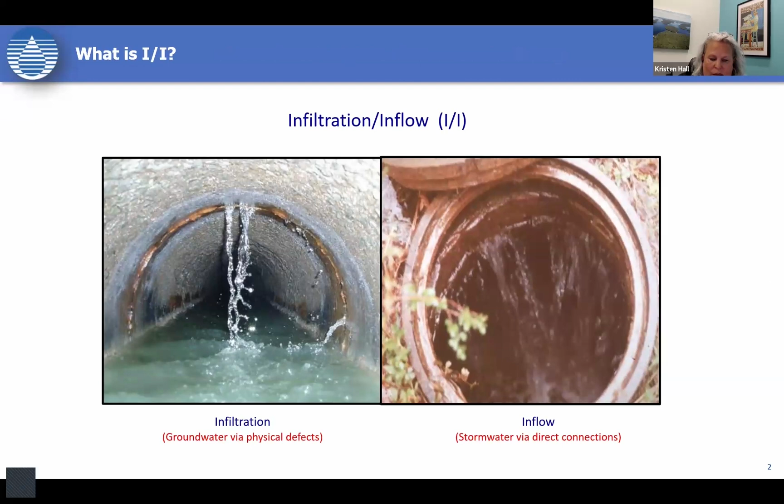So basically starting with some definitions, what is I&I? Infiltration is water that enters the sewer system via physical defects, and inflow is stormwater that enters the system via direct connections. An important point to note is that approximately 45 to 50% of the flow that goes to Deer Island is infiltration and inflow. We put together a visual representation of that for you using data from last year.

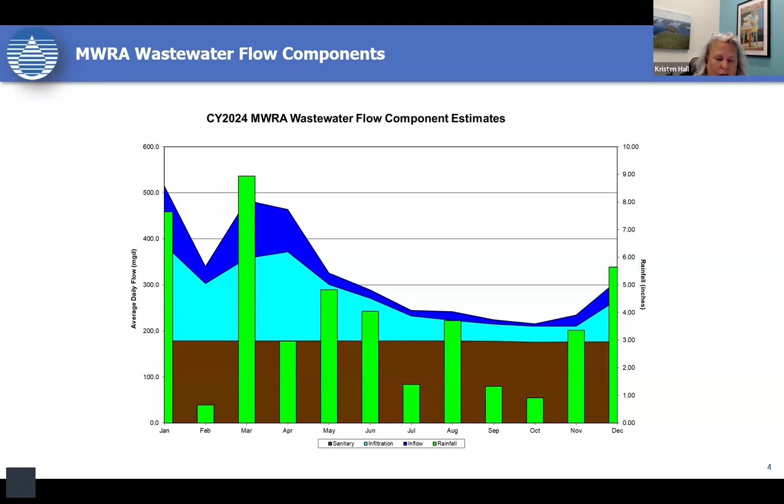MWRA has about 200 meters across the regional system in community sewers and MWRA sewers that we utilize in our rates process. Our metering group reviews the data, cleans it up, compiles it into a flow number for each community per month. Then my group takes that community level data and estimates three components: the sanitary flow, which is the brown line at the bottom of the graph, and that's flow coming from residences and businesses.

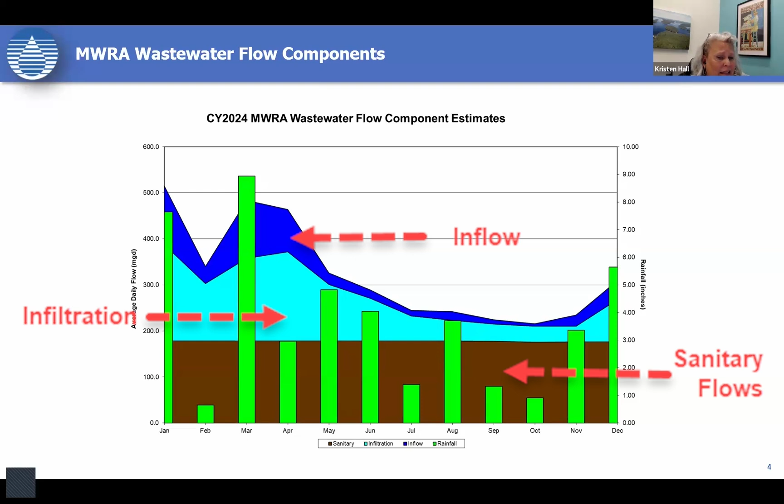Infiltration is the light blue on the graph, and inflow is the darker blue color at the top. The green bars represent the total rainfall for each month, so you can see how high infiltration and inflow are in the wetter, like spring months, versus the drier months later in the year. You can see we had that drought going on last year, where we had very little infiltration and very little inflow, almost right down to our sanitary estimates during September and October.

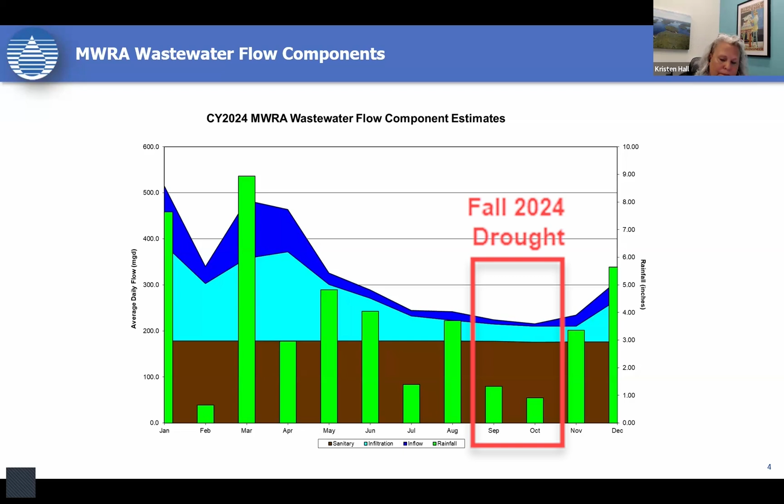So back to how infiltration and inflow get into the system. Sources of infiltration are listed on the left: cracked pipes, offset joints, leaking or broken service connections, or leaking manhole covers or manholes themselves. On the right, inflow comes from things like cross connections in the storm drain system, or homeowners that have sump pumps connected directly to the sewer system, interior drains like a floor drain in your basement, roof leaders or downspouts going straight into the sewer, or an exterior drain like in your driveway.

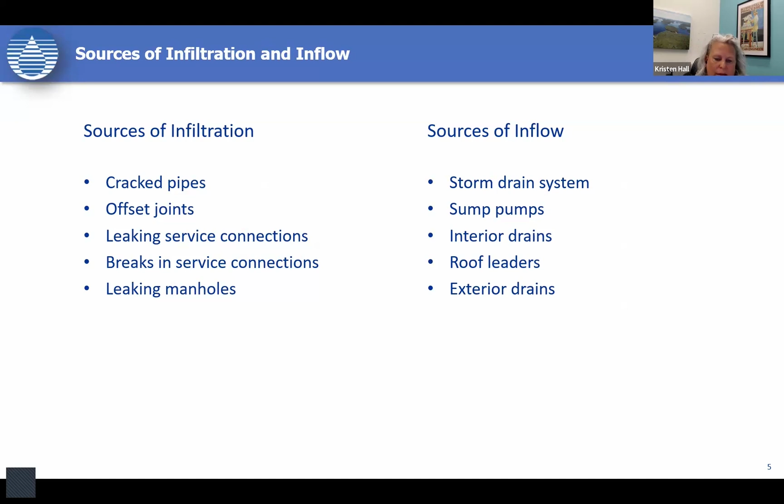So on the next slide, I found this graphic on the Norwalk, Connecticut Water Pollution Control Authority on their website. It kind of just shows you where all this water can come from. And I just wanted to make a note that if you're in the process of doing any outreach or public education, there's a lot of stuff that's already made online. Like I found this, lots of good stuff on a lot of websites. So I would take a look around.

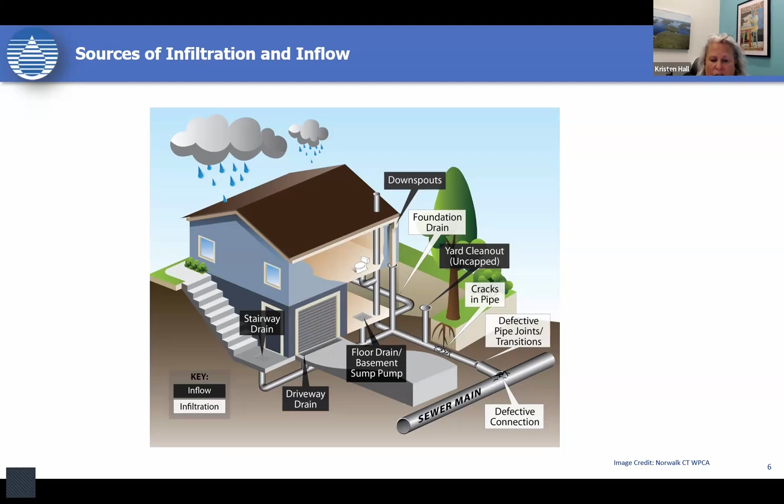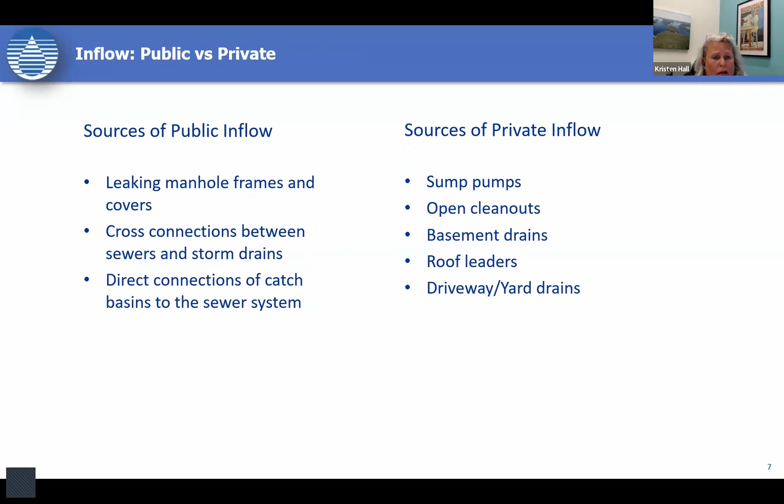So moving on to removing these sources. The public inflow is usually an easier issue to address because it's part of the community system. You have access to it. You can go check it out whenever you want, basically. For example, replacing a manhole frame and cover is easier than gaining access to a private property and redirecting a sump pump across somebody's lawn. Communities may have an easier time just dealing with their own things versus trying to get homeowners engaged.

But now communities have been addressing their I&I for years, and a lot of those public inflow sources have already been addressed. So private inflow removal is complex. It requires extensive investigation, gaining access to private property. There's lots of communication and coordination required. And of course, you're going to run into reluctant homeowners. It involves dealing with lots of smaller sources versus one big source. And we all know there's always a chance that the source that you just removed may be reconnected after you leave.

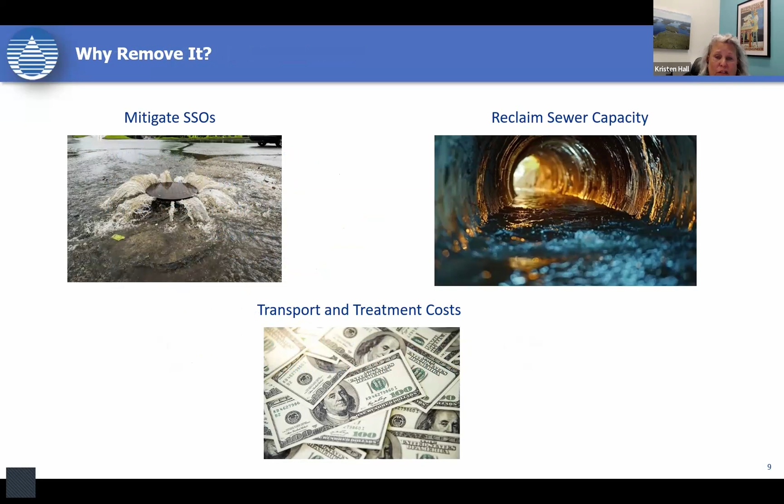So moving on to the next slide, and we've gotten most of the big sources. Why do we still need to go after it? Well, we want to mitigate SSOs. We'd rather not have water pouring out of manholes. We want to reclaim capacity in the sewer system. We want to reduce transportation and treatment costs. Remember, half of the flow that goes to Deer Island is clean water, and you're paying to transport and treat that clean water. So next slide.

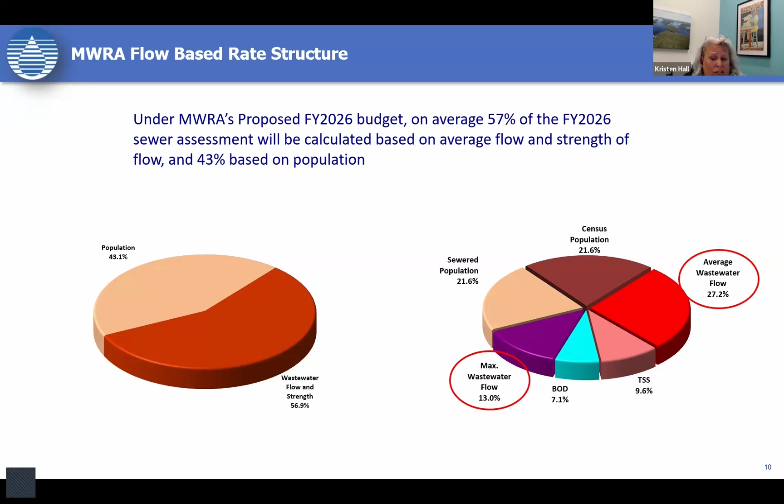Just to talk about our rates briefly, we utilize a flow-based rate structure. So the pie chart on the left shows us that about 43% of the FY26 sewer assessment is based on population. So that means the remaining 57% is based on flow. On the right, that same pie chart is broken down further to show you that it's your average wastewater flow, but it's also your maximum wastewater flow that come into that equation as well. So there's money involved here. So next up, Colleen Rizzi, who's MWRA's Director of Environmental and Regulatory Affairs, has a few things to say about wastewater flow challenges.

Thanks, Kristen, and thank you. Next slide. So we're faced with a number of challenges on the wastewater side related to our wet weather flows, as Kristen's mentioned. And one way we're looking to help mitigate those challenges in our existing service area is to implement I&I removal projects. Part of that removal, again, is to reclaim capacity in our collection system and at our facilities, mitigating SSOs like we've talked about, and then helping to alleviate CSOs.

As we look ahead to changing climate conditions, increased rain events, whether it be the intensity of the storm or prolonged duration or even frequency, this becomes more concerning, right? But we're also looking ahead to potentially changing regulatory requirements, whether that's more stringent treatment requirements or changing discharge limits. As already mentioned, 40 to 50% of the flows to Deer Island are related to I&I, and that flow also has to travel through other facilities to get there.

MWRA has always been proactive when it comes to assessing the long-term needs of our system, both water and wastewater. And as we see increased development in member communities, or we're fielding requests for additional entities to join the system, we want to address and be clear about what capacity is available, and it's not much. This is why we're looking for I&I removal to be implemented before new flows enter the system. Some of you may have been on the advisory board meeting earlier this year when we discussed messaging to communities or to entities looking to discharge through our member communities with new sewer, where we are seeing an uptick in those requests over the last, say, 6 to 8 months.

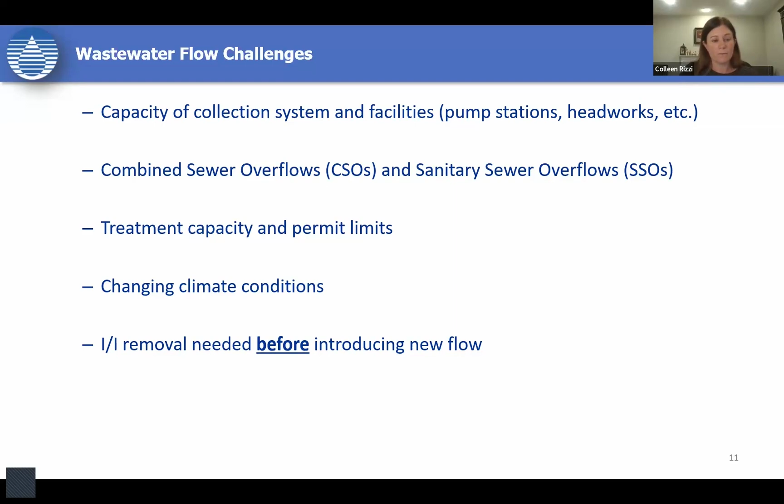Okay, so I'll turn it over to Brian and Megan, I believe, to discuss Burlington's experience. Thank you, Colleen. So our engineering division manages our I/I program. And so unfortunately, Megan's not here. She's tied up somewhere else. But I have Tom Hayes, our town engineer, here to give the presentation. And I also managed it for a number of years back when I was in engineering, so I can also jump in from time to time. Good morning. So I'm Tom Hayes, town engineer. Megan is out in the field, stuck on a job, so I guess I'm filling in.

So Burlington is a town. We have about 115 miles of sewer. Most of the sewer was built out in the late 60s, early 70s, and we really don't have a capacity problem. I think our system is designed for about 9 MGD, and I think we send between 3 and 4 down to Deer Island. The problem is restrictions downstream from us.

So when we have a big rain event, we don't really have a CSO. We have to bypass pump out of our main pump station into Vinebrook. So we set up pumps and then we pump overboard. We have a deal with Woburn. So when the manhole down at Horn Pond starts to rise and discharge, then we pump overboard. So that's how the whole thing works. So if you go to the next slide,

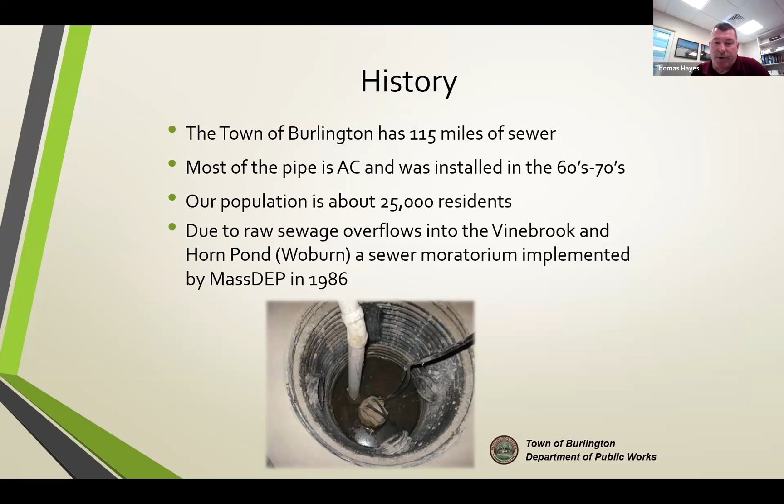we've been under administrative consent order since the mid 1980s. So as part of the ACO, at that time, we were required to remove 10 to 1. So it was 10 to 1 required by the DEP. And then we added an extra 1 on for us. So if you're connecting to the sewer system, you'd have to do mitigation at a ratio of 11 to 1. And then we had this sewer bank set up. So that allowed, when the bank had enough capacity in it, we could start handing out connections to residents.

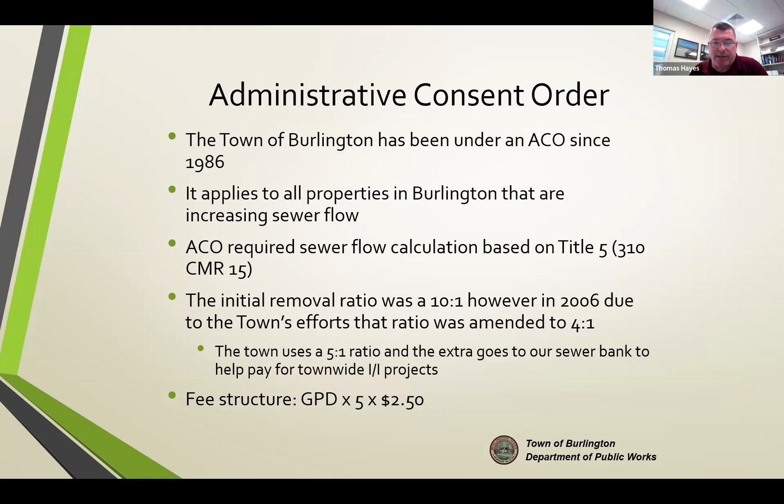Around the early 2000s, we worked with DEP and they actually let us kick that down to 4 to 1. And again, we still add 1 for the town. So it helps out the residents. The current rate is $2.50 per gallon multiplied times the ratio of 5, and that's the fee for adding sewage into the system. That's the current fee right now. If you go to the next slide.

So again, the residents pay a fee. It's typically, I think, 110 gallons per bedroom. Is that correct, Brian? 110 gallons per bed. Yeah. So we have a lot of redevelopment, a lot of people tearing down the ranches and capes and putting up these big houses. So 2-3 bedrooms goes to 4 or 5 bedrooms. So they come in, they can drop off a check. Developers, on the other hand, if they're going to increase the flow by more than 1,000 gallons per day, they can pay a fee for half of it, and then they have to do mitigation.

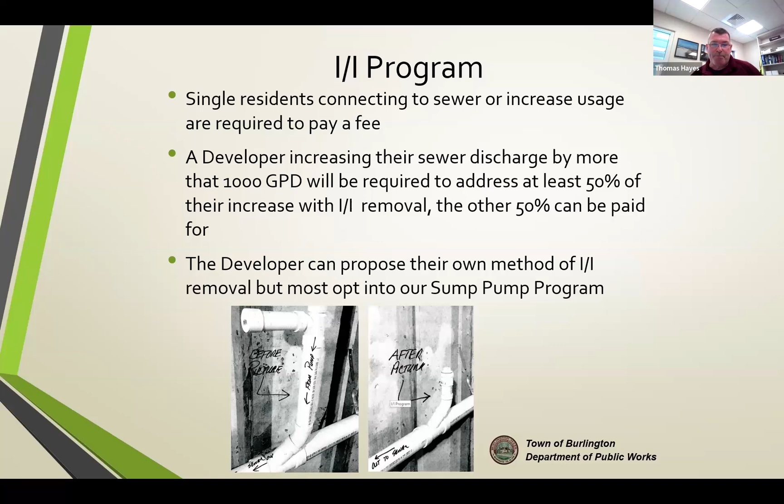And they have their choice. They can, if we have, from our I&I studies, if we've identified inflow and infiltration, they can select those and they can do those. But the easiest way is sump pumps. So we assign them. We have a list. And if you want to go to the next page, we have a list. We call it the amnesty list, and we have a list of these folks that have, like, first come, first served. So if you sign up and you're the next on the list, then we assign that to the developer.

And gaining trust with the residents was a big part of this, because we're the government, we're here to help you, and people are not trusting. So it took a lot of time to gain their trust, over the course of many years. I mean, this started in the 1980s, and there were a lot of door-to-door visits to see if these people had sump pumps, and like everywhere else, you don't want to let someone into your house if you have something illegal. So it took a long time to gain trust, but people call all the time, and they're familiar with the program and they're willing to sign up. Want to go to the next slide?

I'll also add another way to kind of get access. When your staff goes in to do final water meter reads or water meter replacements, we were also tying in inspections to identify if there were illicit sump pump connections. So that's also another way. If people are hesitant to let you in, you can kind of build it into that structure and hold up perhaps the sale of a house, and it's a slower process, but that's a method for communities that have trust problems with their residents.

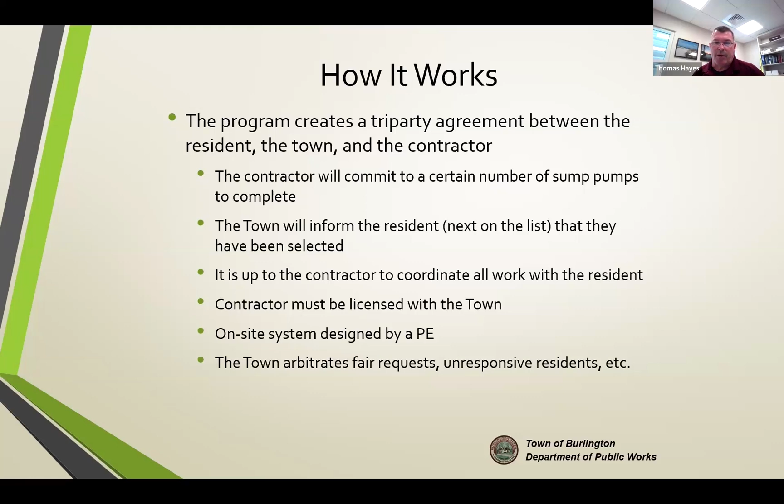They draw up a sketch of how they make this connection, whether the connection goes out to the drain, or if it's discharged in the backyard, or it might be an on-site system, like an infiltration system. So we all agree that this is what is going to happen. They hire a licensed contractor to do the connection. If it's an on-site system, it has to be designed. We don't want them just to say, we're going to do a dry well. It has to be designed by a professional engineer. They'll have to do test pits, see where the groundwater is, see what the soils are like. And then if there's a problem, if the homeowner wants a gold-plated sump pump, that's unreasonable. So we will arbitrate any sort of problems between the contractor and the resident. Next slide.

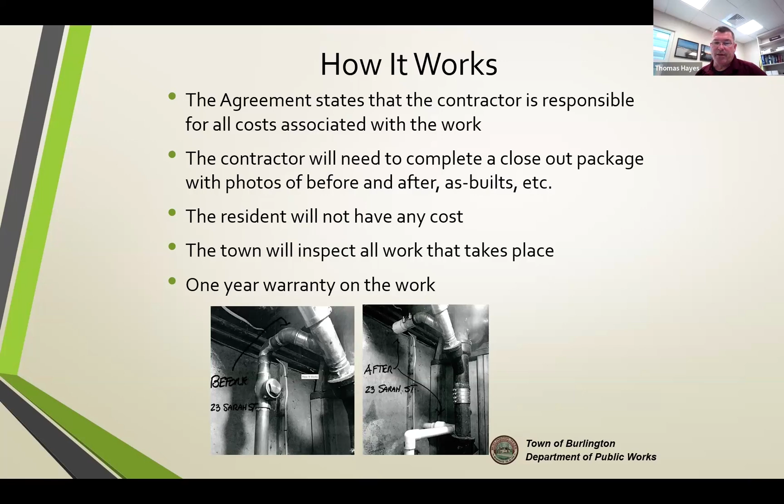So the contractor is responsible, and I'm using contractor interchangeably with the developer, because the developer hires a contractor, so they have to work together to get the sump pump done. So they're required to do all the work, and they pick up all the costs. Once it's all done, there's a closeout package: photographs, sketches, so that we know where the sump pump is and where it discharges to. So if there's a problem in the future, we'll have it on file. And then again, we do the inspection, and we require a 1-year warranty for the sump pump in case there's a problem. Next slide.

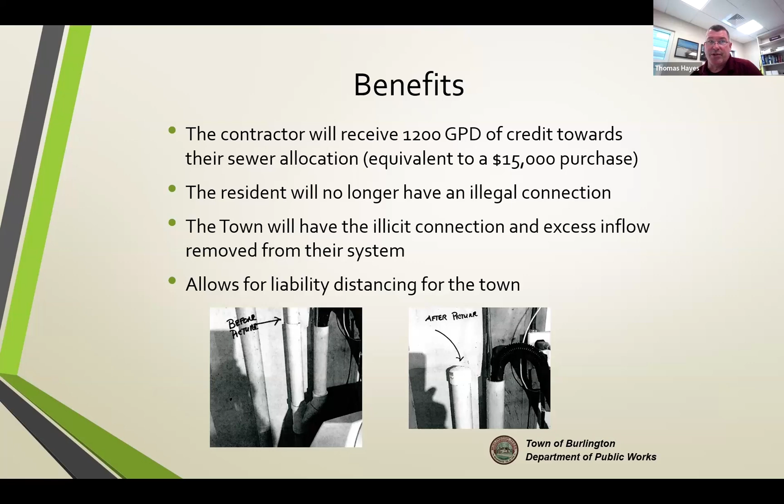So the contractor gets 1,200 gallons per day credit towards the sewer allocation. It's equivalent to about a $15,000 purchase price. Sometimes it's good. If the homeowner just wants the hose stuck out the window, that's great, it's pretty cheap. We've had ones that actually cost $30,000. They had to run down the street to connect into the drain system. So, obviously the resident doesn't have an illegal connection. We remove the flow, and we are not directly liable for that connection. So it kind of gives us some liability protection. If there's an issue, we go back to the contractor to fix it. Next slide.

So it works for us. In Burlington, the tax base is like 2/3 commercial, retail. So over the course of the last, I don't know, 30, 40 years, we've had a lot of folks coming to the town wanting to do development. So for a residential community, it might not be suitable because of the high cost of doing the sump pump redirect. Again, trust is huge. It took a long time for the residents to trust us.

We keep this amnesty list, and we will not give it to anybody. We've had DEP ask us for the list, and we said no, we have to protect the residents, because we told them that we would do this at no cost and no liability to them.

Another problem that popped up, we get the phone call a lot, is like, why are you redirecting this person who has an illegal connection when I have a legal one? Mine goes out in the backyard. But we have to try to explain that, well, you don't have an illegal connection. Redirecting you doesn't do us any benefit. It doesn't give us sewer credit, so it doesn't work. So that's a question we get all the time.

And then finally, there's a stormwater, high groundwater, flooding problem in the area. There's concerns about adding more water into the drain system. Next slide.

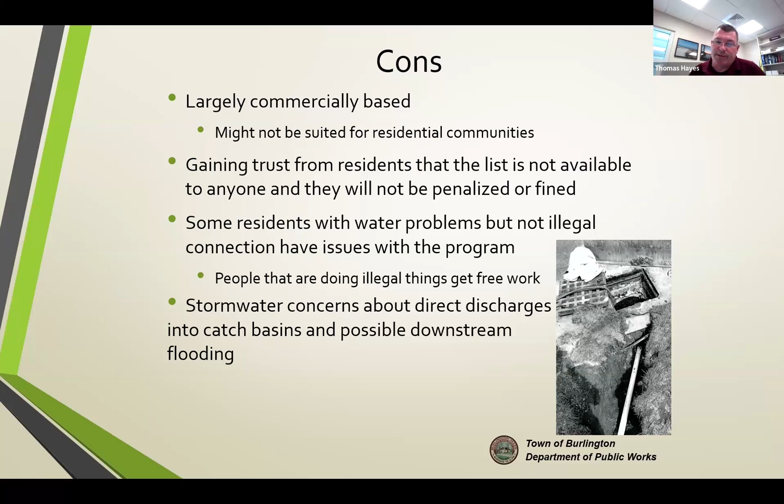How do you determine the best discharge location suitable for the resident and the town? We require that the sump pump be directed into the drain at a structure. You can't just put a saddle on a drain line. They have to connect into a catch basin or a manhole. If they don't have access, say if they're adjacent to a wetland, the contractor may have to go to the ConCom and get a permit from them, like file a notice of intent to discharge into that wetland.

And then if it's on site, it has to be designed by a professional engineer and has to work. A lot of times where you have a sump pump, you have areas of high groundwater, so we have a handful of on-site systems because typically the site is too wet. And does the contractor bear the cost for the engineering? Yep, they're required to do everything: all the costs, all the permitting, all the engineering, all the construction.

The worry, as I think Colleen may have mentioned, was people reconnecting. So we tried to put a lot of time into thinking of ways to keep people from having problems after the work was done, and then they'll just throw it in. So we don't allow any above ground hoses or anything. Everything has to be buried. Above ground is too much chance to cause damage, and then they're not going to fix that. They'll just dump it back into the connection they had.

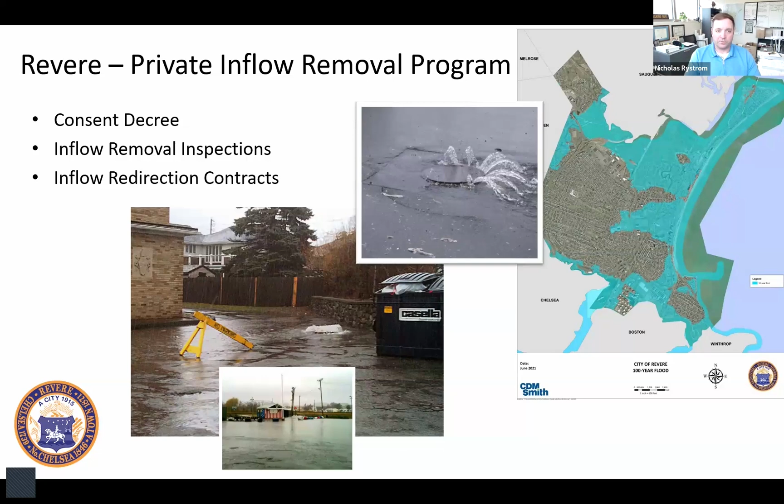So from the beginning, we needed to be able to enforce some of the discharges that we were encountering. So the first thing was to amend our city ordinances to allow us to then enforce what we were trying to correct.

Following that, we established an amnesty program. This, among other reasons, was to try to promote participation. The amnesty basically was: let us come in and take a look, and it will be of no cost to you, and you won't be penalized for having an illicit discharge or an illegal connection. That really helped us be able to get into a lot of properties. Unfortunately, there are still some folks that were not trusting of the city and still would not let us in. But as we went through that, we would then start to conduct inspections to give ourselves a baseline.

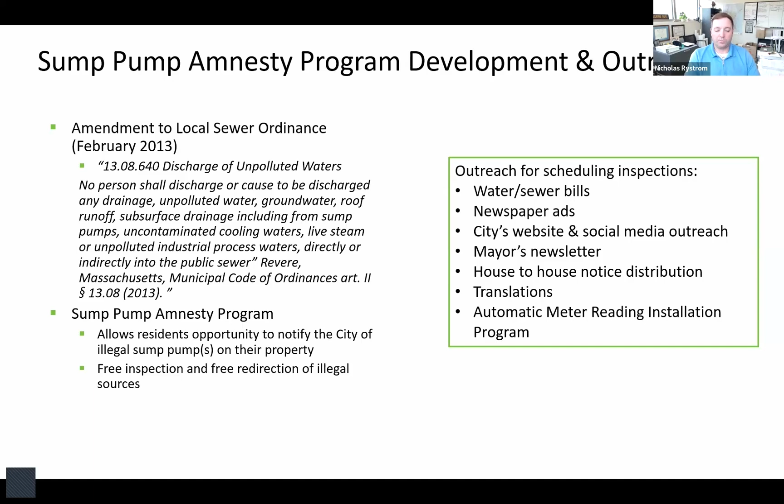So the idea was to try to inspect all properties in the city, and then document them and try to track them as we're removing as many as we do year after year. The tracking is very important. You need to make sure that we are aware of what's in existence and what is being removed, and we have to document what did get removed, so that if someone decides to reinstate a connection that shouldn't be there, we have information that we did in fact remove it prior to that.

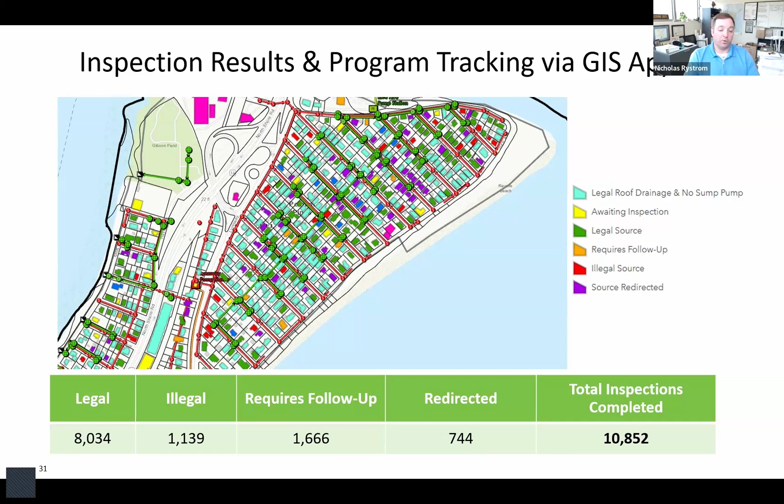On this slide, you can see some of the results of our inspection. We conducted a total of just under 11,000, which is just shy of the entire city. We have just over 11,000 properties. Some were found to be illegal, some were found to be legal, and some were inconclusive at the time and required follow-up inspection. Of those, thus far, we were able to redirect 744.

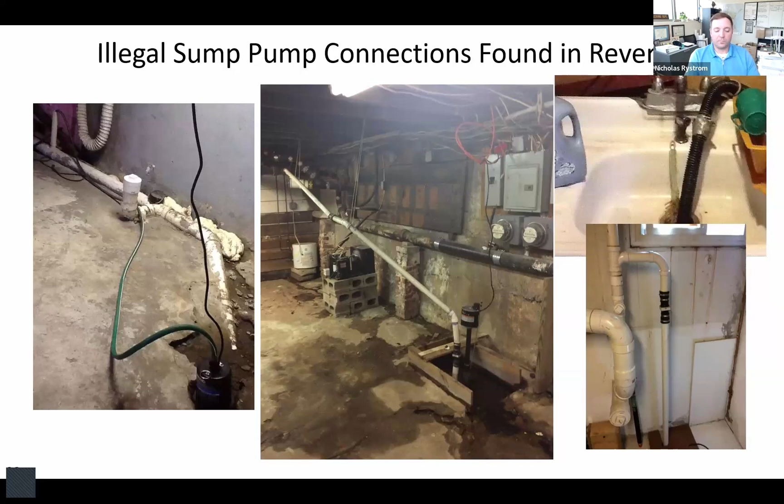This is just a few examples of what we're finding in some of the residential houses here in Revere. You can see some pump connections directly to interior plumbing, often hard piped into a clean out in the basement or into a stack or other plumbing in the house. In some cases there were movable discharges, like on the right, into a sink in the basement. Sometimes people would discharge them out a window in the summer, but bring them in during winter and discharge into a slop sink or similar.

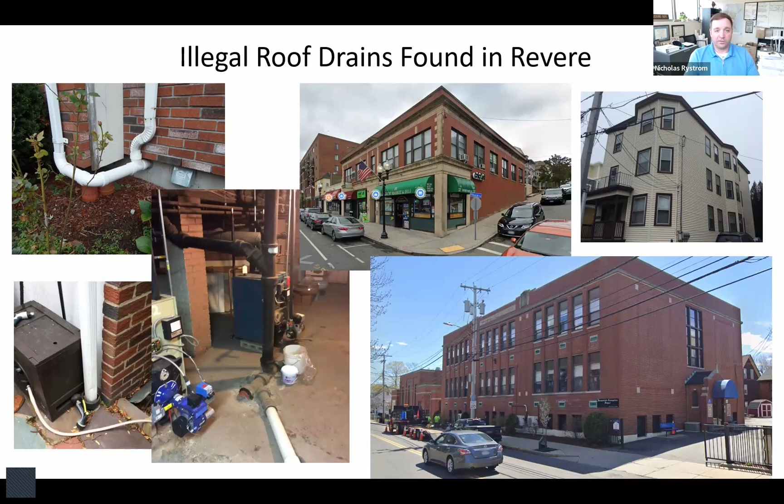In addition to sump pumps, other sources we encountered were roof drains and roof leaders. A lot of the roof drains were on larger residential properties and also commercial properties. You can see on the bottom right, that's a school. On some residential properties, there's a connection of roof leaders from a gutter that in some cases were piped back into the house and tied into the drain, into the interior plumbing.

So we had a couple of different options for redirection. Early on, we looked at redirection to splash style setups and also to infiltration basins. In the first contract or two, we did a handful of those. We found, and this may be significant to Revere since we're an urban community with a lot of pavement and those types of materials, that redirecting to splash setups or infiltration basins caused problems in some cases. We got the flow out of the system, but it caused some other problem, like an icing issue in winter, or with infiltration basins, if the groundwater is really high, the yard would be like a swimming pool for a lot of the year.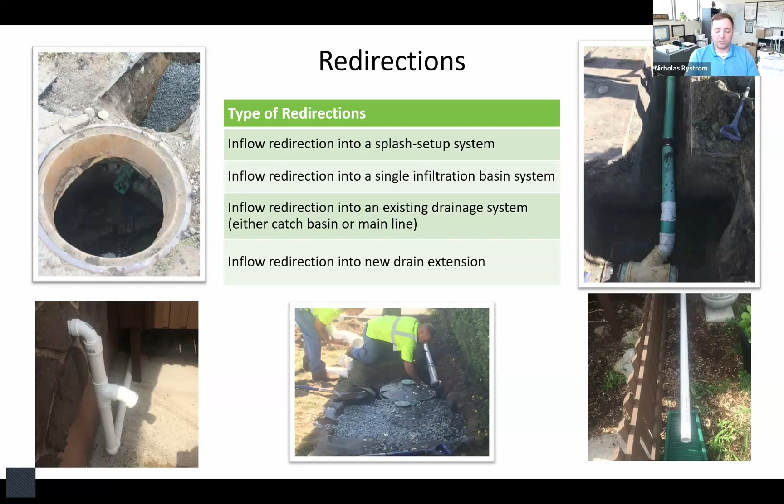So those ones we ended up going back and redirecting to provide a hard connection to a drain in the street, usually, or an extension of some type. The other two options, which is what we've been doing for the last 9 or 10 contracts, involve redirecting directly to a catch basin or a mainline pipe in the street, or in some cases, if there are enough of these on a single street, we'll install an extension of the drain system to tie a handful of those in somewhere. We really got away from the splash setup, since it caused us some problems, creating other issues even though we solved the problem we initially set out to solve.

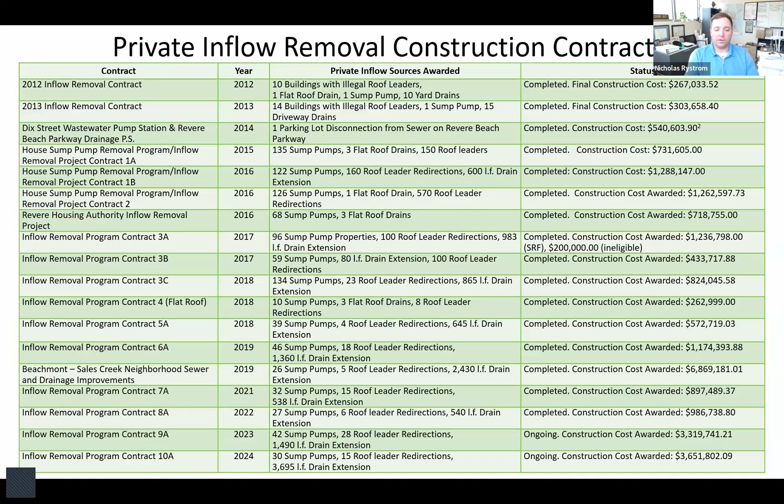As you might imagine, there's a lot of variation. Every house is different. Some people have their basement finished, and there's some interior work that has to happen. In some cases, properties are larger, and there's more opportunity for trenching with a machine versus by hand.

We did utilize a lot of the investigation tools in order to make sure that we could nail down what was needed for each one of these. That included CCTV work, cleaning out of the system in the street to see if it was able to handle new connections. And in some cases, we did test pits to see if there was any obstructions or interaction with other utilities.

As I mentioned, there's different components for each house. Maybe we're coring through a foundation, maybe coring through a sill, maybe you're able to get out in a different way. What we tried to do at any property we were at, we tried to capture all of their potential sources - roof leaders, area drains, roof drains, sump pumps, all at once. The other part of that was to try to prevent any reconnection. We would hard pipe all of our work so that it was very difficult to undo.

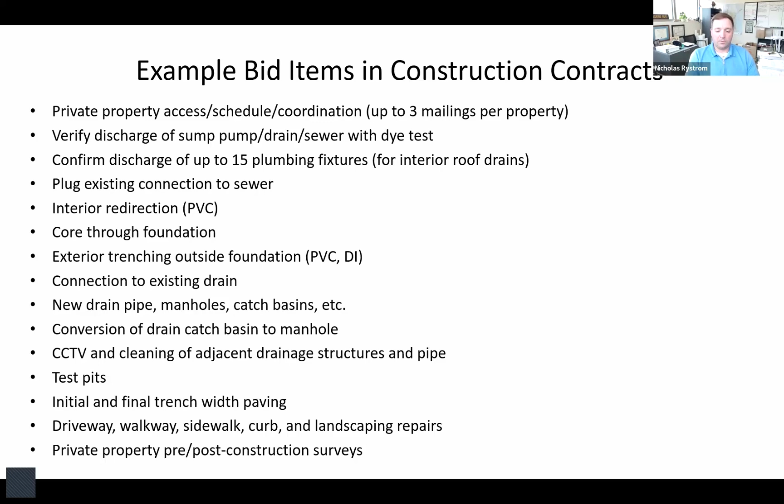We'll show the sump pump and where it's connected, the fact that we're going to be disconnecting it and providing a plug to that connection, and then some type of penetration through the foundation and a trench out to a new manhole or a new catch basin or an existing one for that matter. But it's important to have this be as detailed as possible so the contractor knows what they're responsible for.

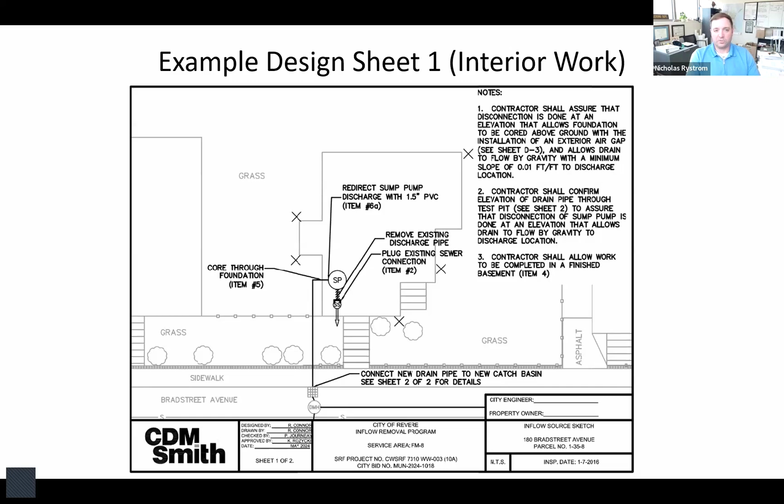What we also did was provide this to the homeowner so they also are aware of exactly what work is happening. For us, we made sure that the homeowner viewed this and signed off along with myself or somebody with my staff, so there was no confusion or disagreement after the fact as to what actually was the scope of the redirection.

Next slide, please. This, as I said, is just a design example for exterior work.

We did a lot of improvements and extensions to our existing system so as to be able to discharge or connect sump pumps and other things and provide a place to be redirected. There are still some parts of the city that do not have a stormwater collection system in the street, and so we're gradually adding extensions so that we can redirect sump pumps that right now are illegal but have nowhere to be discharged to. These are ones that we would include in a design package along with the previous slide.

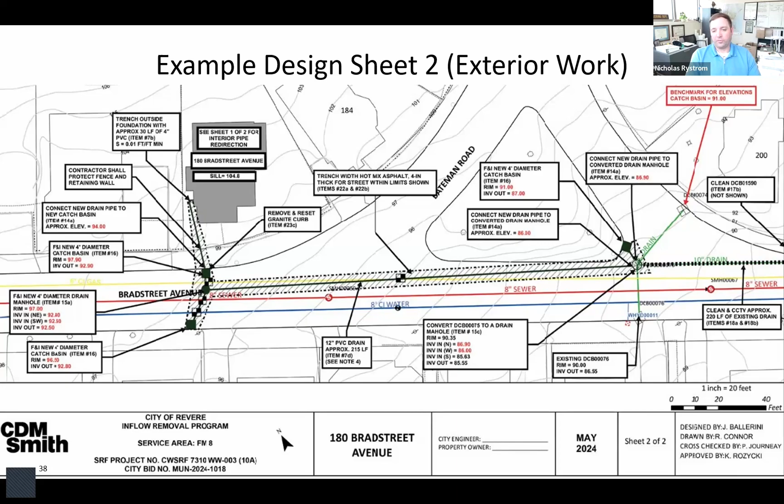So just some things to consider for a successful program. Something the Burlington folks mentioned is trust, and the general property access that goes with that. Some people just are not trusting, or they don't trust the city, that we're not looking for other things. They didn't want to let us in because maybe they have an illegal apartment or something else. So we had a lot of conversations with people. We tried really hard to educate about why we were there, what our goal was. There was a lot of flyers and literature that we also provided.

Another part of that to try to promote participation is the offer of an amnesty program, and how that helps everybody. One of the things mentioned earlier is the amount of inflow that is sent to Deer Island and is cleaned. So we have clean water that's being cleaned, and that obviously costs the city and other municipalities a lot of money, which then is relayed to the residents and the ratepayers.

What I mentioned earlier also is the importance of keeping track of our findings and our redirections. We have a GIS that we use for all of our utilities, and we're able to incorporate the inflow removal information and documentation within that. So it's easy for us to see what properties have an illicit connection, or what properties have been redirected already. And then if somebody says there's a problem here, and we find that somebody had redirected their sump pump back to an illegal connection, we can say we redirected this once already - now it's going to be on the homeowner to correct it the second time.

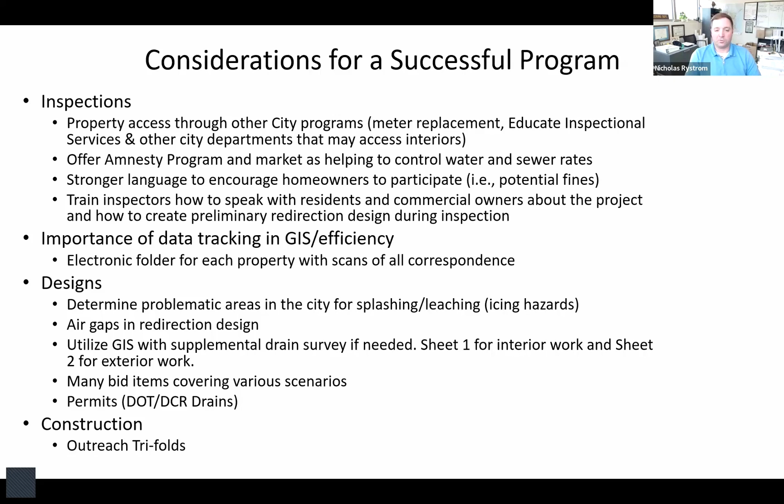As far as construction goes, we put together, in addition to other literature, these trifolds. If you go to the next slide, you'll see an example of what we distribute for each one of our projects to let people know where the work's going to be happening, what is actually going to be happening, what the schedule is going to be, and then provide some amount of contact so that if people have questions—hey, my street is highlighted, am I included? Or, you're doing the street next to me, what about my street?—they can give us a chance to contact them and ask about any of the things we're doing.

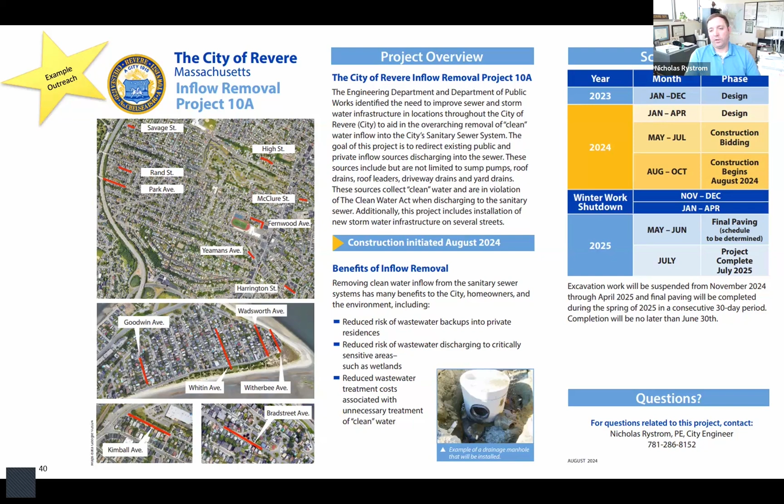So next up, we have a couple folks from my staff. Israel and Gloria are going to talk about our I&I Financial Assistance Program briefly.

Hi everyone, my name is Israel Alvarez, and I manage the MWRA's I&I Financial Assistance Program. Next slide, please.

Funds are added every few years in different phases. There have been 16 phases added so far. Through December last year, 2024, a total of $566 million has been distributed to fund 688 I&I projects. That includes planning projects, studies, investigations, design work, and construction projects.

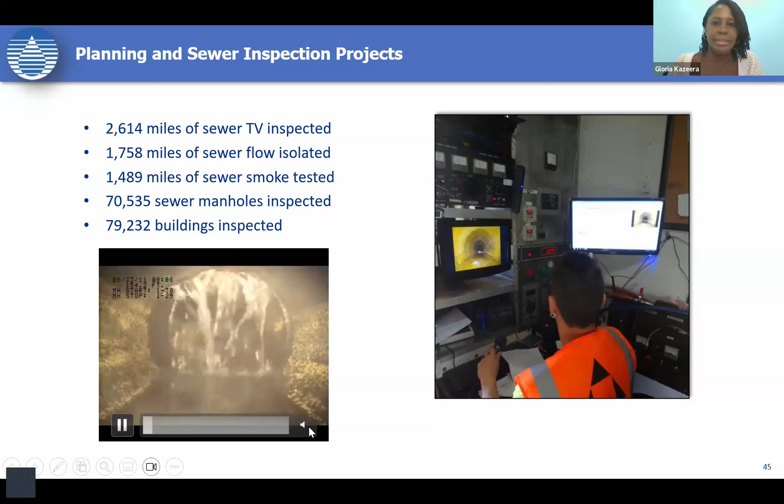So for planning and inspection projects, besides TV inspection, flow isolation, and smoke testing projects, we have funded the inspection of over 70,000 sewer manholes and more than 79,000 buildings. Below we have a video clip showing a sewer TV inspection capturing signs of infiltration. So I don't know if we can get to see the video clip. Yeah, right there. So that's signs of infiltration in the sewer.

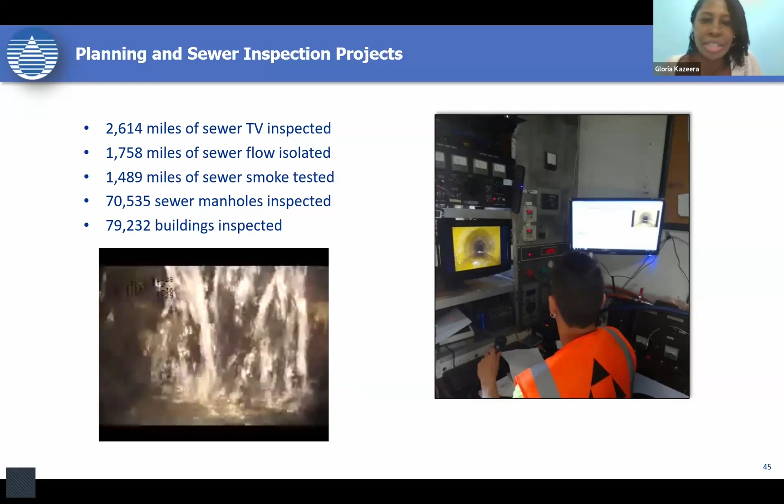Next slide. So speaking of infiltration, we have funded sewer replacements, lining projects, and repair initiatives. This includes the installation of 365 miles of cured-in-place pipe liner and the repair of over 20,000 service laterals. So the images show the before and after repair of a cracked pipe by installation of cured-in-place liner. So for next slide, sorry.

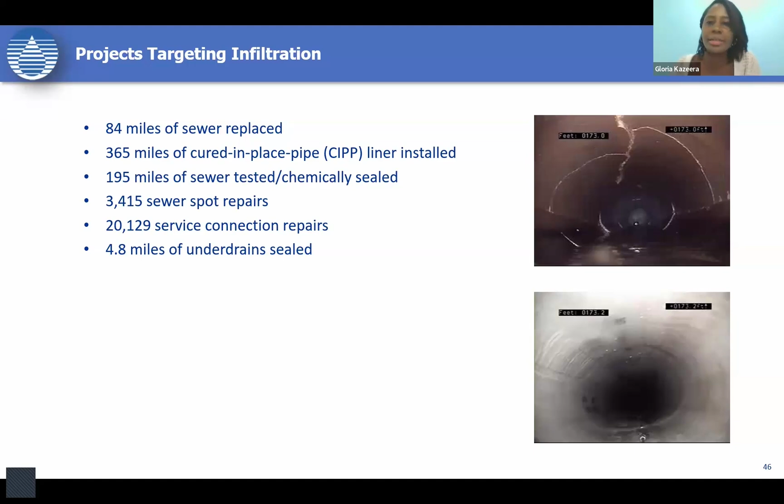For inflow, we have funded the rehabilitation of nearly 25,000 manholes and the replacement of over 4,000 manhole covers. For private inflow, we have funded the redirection of 500 sump pumps and the disconnection of nearly 6,000 downspouts and area drains. So these images show rehabilitated manholes, the images displayed below, if you can see those.

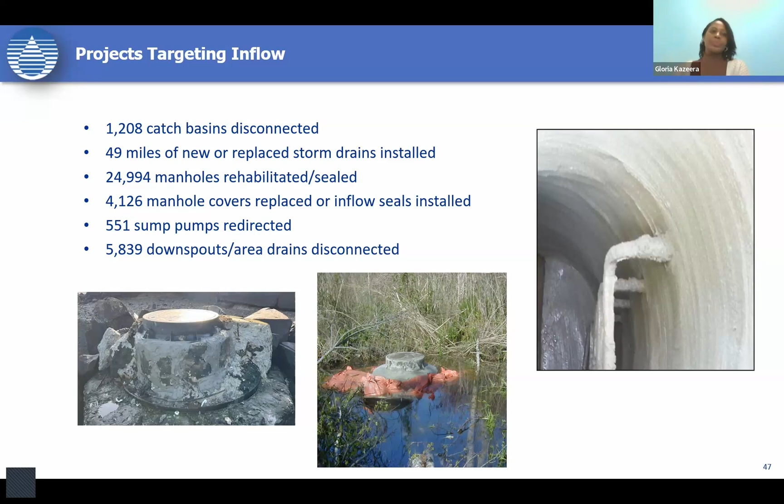Kristen will now discuss the impacts of these efforts to the system flows. Thank you. I just want to add to the sump pump stat that Gloria talked about, that we were going through some records. Israel was looking through some projects, and we funded the design of a lot of the removal and investigation work, but not necessarily the removal itself. So the numbers are probably higher than what we have there.

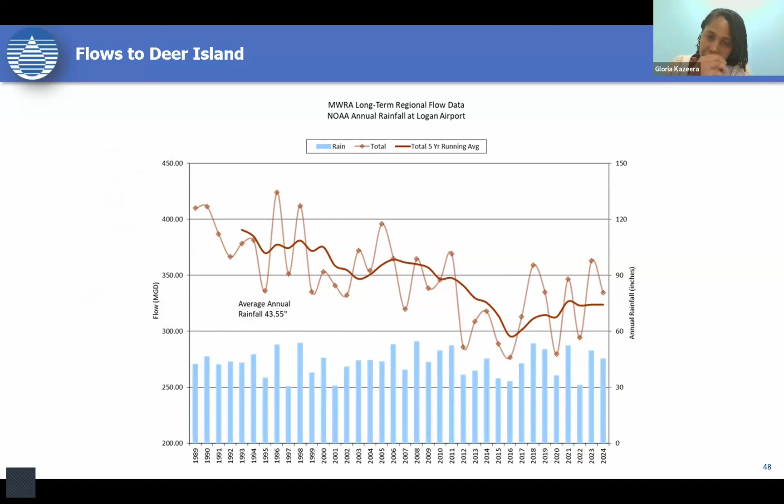So I just wanted to throw a graph up here quickly. I know the big question is, can we quantify what we've been doing? So this is a long-term regional flow graph that depicts the gradual decrease in flow to Deer Island. The lighter line is the annual flow to Deer Island, and the darker brown line is the 5-year running average. And the blue bars at the bottom represent the total annual rainfall. Now, it's not a complete picture because flows are also dependent on how, when, and where that rain falls. But in general, the greater the rainfall total, the greater the flow volume to Deer Island.

So I/I removal is a difficult issue for us to quantify because we have competing projects going on all the time. In our communities and in areas of our system, we're working hard to keep that extraneous water out. But we also have CSO communities, and in those areas, we're working to keep the CSO flow in. And then there's the water use factor, where we know water use has decreased over the years. But on this trend, overall, you can see that flows have come down quite a bit.

If you look at the beginning of the trend, say the first 10 years, 4 of those years saw average daily flows over 400 MGD. 5 of those years were between 350 and 400, and only 1 year dropped below 350 MGD. Now, if you look at the last 10 years on this trend, the average daily flow didn't even get close to 400. And in only 2 of those years was it over 350. And 4 of the years it dropped below 300. So you can see flows are coming down, even with rainfall that's similar.

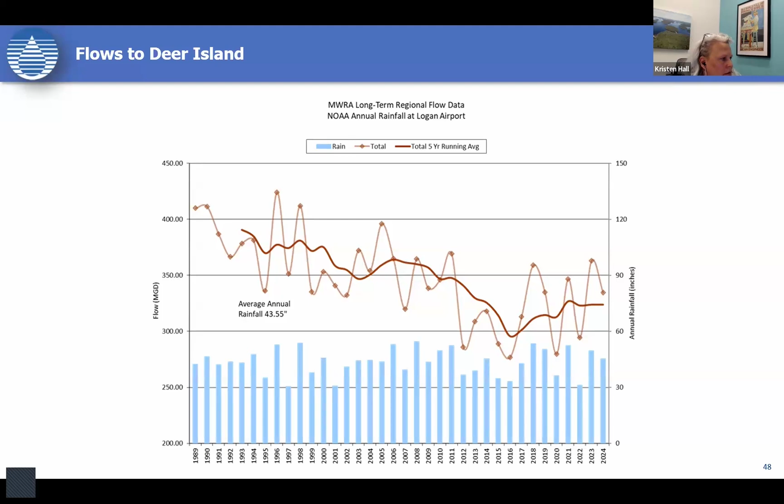So next up, we have our next quiz question. Let's see, what do we have? So what projects are eligible for funding under the I/I Financial Assistance Program? Manhole inspections, catch basin disconnections, sump pump removal, or all of the above? Go ahead and submit your answers. So the answer was the last option, all of the above. So hopefully we all got that.